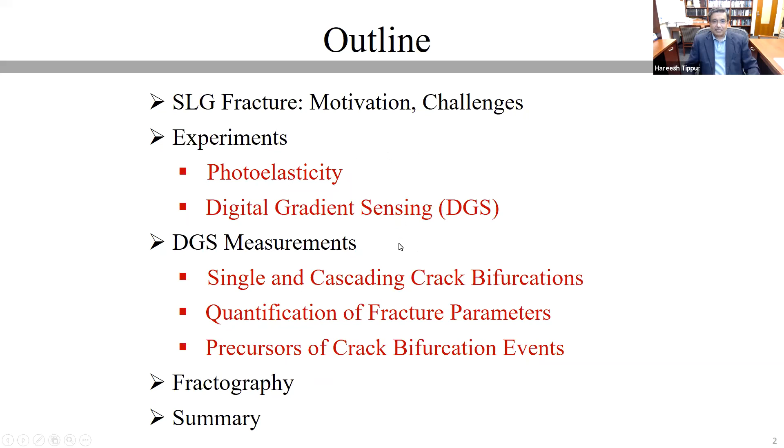So the motivation for this talk is as follows. Soda-lime glass is one of the very widely used structural materials, transparent structural materials. It is used both in civilian as well as military structures. You can see this iconic structure in front of the Louvre in Paris, and you can also see the glass cladding often used in skyscrapers. Another place you may not have noticed is the transparent armor used in armored vehicles. Some of these armored vehicle windows are about a foot thick, 12 inches thick, so that ammunition doesn't come through - shrapnel is prevented from entering the vehicle and harming the personnel.

Soda-lime glass is over 80% of all manufactured glasses even today.

This is a huge amount of glass. I once read that you could lay a road all the way from Los Angeles to New York using the amount of glass manufactured just in the US on a yearly basis. It has excellent optical properties, very high stiffness relative to other transparent materials, high compression strength, and excellent fire and chemical resistance. More importantly, it is a low-cost and sustainable material.

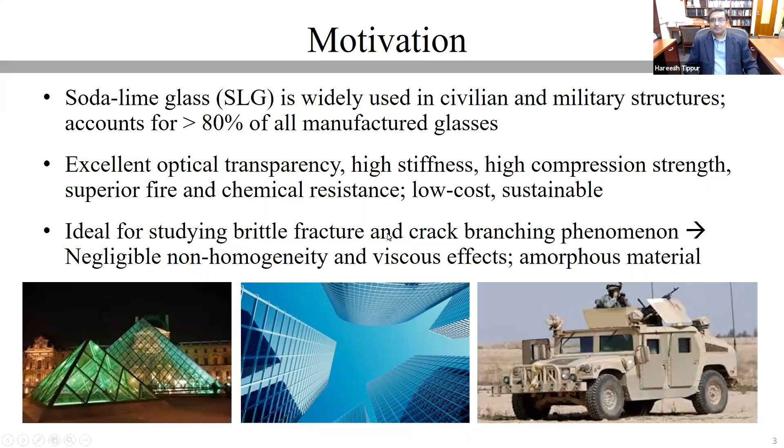The results don't necessarily match up nicely with the brittle fracture we often see in glass. This is an important challenge to note: the reason people were not able to study soda-lime glass all these years is because it is not only a stiff material, but also a highly brittle material.

Failure strain is less than 0.1%, and fracture toughness is 0.6 megapascal root meter, in case you're familiar with that literature. Tensile strength is rather low—at the low end it could be as low as 40-45 megapascals. And cracks in this material often travel very fast, typically in the range of 1,000 to 2,000 meters per second.

So a mile-per-second crack speed is very common in glass, particularly under dynamic conditions, and deformations are highly localized. When you talk about a hairline crack, this is truly a hairline crack—crack tip opening displacement is as small as 100 nanometers or less.

Another challenge we always come across with glass is that its elasto-optic properties are relatively weak. The stress optic constant and elasto-optic constant are both low—I'll explain what they are in a second—and as a result, full field optical investigations with glass have been prohibitively difficult.

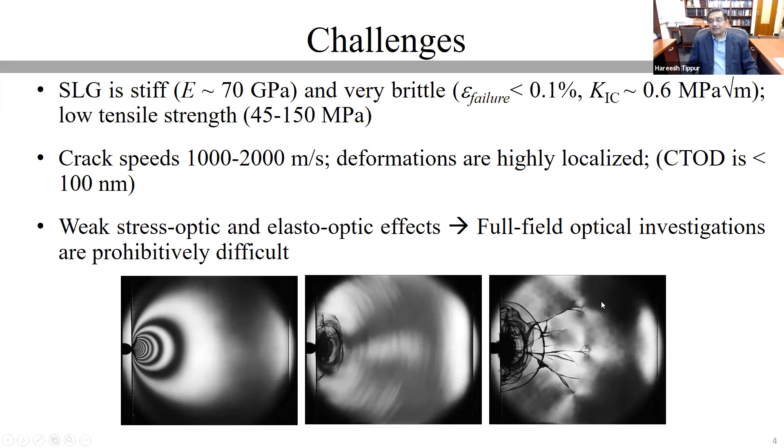Here I'm showing at the bottom an experiment we undertook a while ago where a projectile impacted the edge of a plate. You can see that when compression is dominant at the impact point, the photoelastic fringes form very nicely. On the other hand, when cracks begin to propagate, fringes disappear very quickly, and a propagating tensile crack usually does not have any fringes at all for us to analyze.

Let me talk about the experimental details—the specimen and material details. Our specimens are basically planar geometries with a V-notch on one edge, and a crack extended into the material a little bit further. All the experiments were done on quarter-inch thick samples. We have a couple of geometries, and I'll show results for both. This one is a 4-inch by 6-inch sample.

The material properties relevant to us are density—2,500 kg per meter cubed—and the longitudinal and shear wave speeds, which are 5,700 and 3,400 meters per second. I want to highlight the stress optic and elasto-optic constants of this ordinary soda-lime glass material. The stress optic constant is about an order different from that of Homalite, a popular polyester used to study crack branching events in the past. The elasto-optic effect is at least 40 times lower compared to, say, plexiglass.

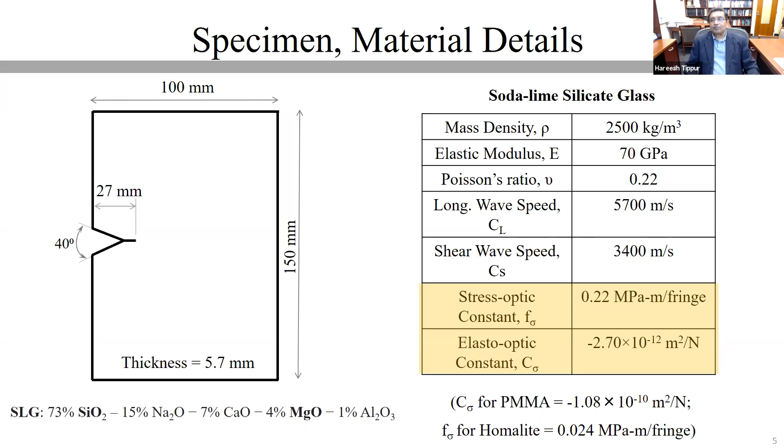These are the things that make studying glass extremely difficult, and people had given up on it for a long time, going instead to study the problem using polymeric materials, despite all the problems faced with polymer substrates. The specimen was loaded in our experiments using a 6-foot long bar.

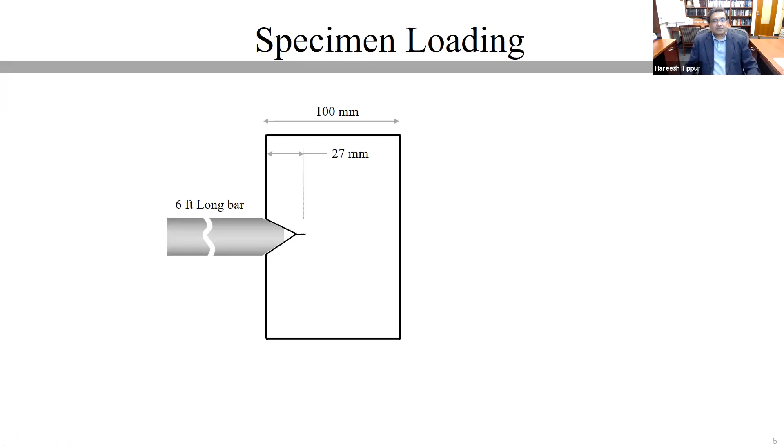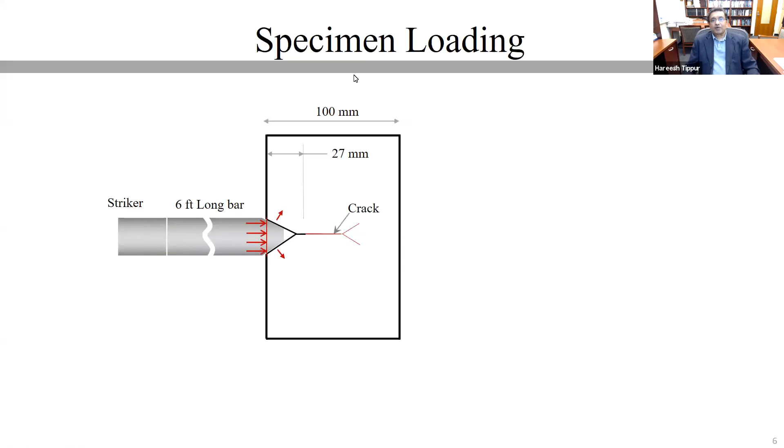It's a long bar so that we can get a one-dimensional wave to travel and impact the specimen. We basically launch a striker, and it creates a stress wave that loads the specimen. Once the crack initiates from the inserted notch tip, it travels some distance and basically branches on its own, without any provocation.

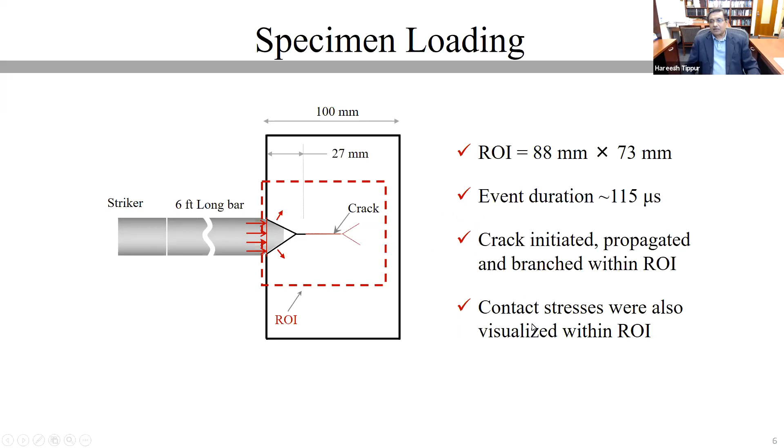The region of interest we investigated in this experiment is about 3.5 to 4 inches by about 3 inches—a fairly large area considering the sensitivity of the method I'll be showing you later. The event duration is about 100-plus microseconds, during which the crack initiates, branches, and propagates all the way to the end of the region of interest. We can also measure contact stresses by adjusting the location of the region of interest.

First, I will show you some photoelastic results so that you appreciate the difficulties that we faced.

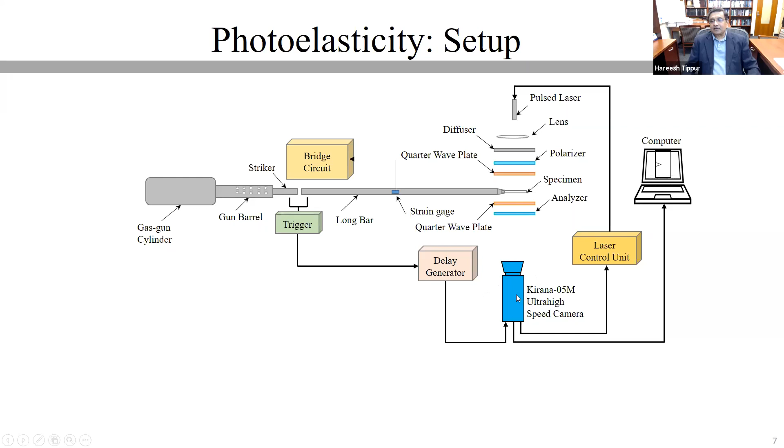The specimen is kept as part of a standard circular polariscope. It has a pulse laser, which produces laser pulses about 160 nanoseconds long and repeats itself. The event itself is captured in the form of fringes by a high-speed camera, which is a Kirana high-speed camera.

The details of that high-speed camera are as follows: it is a fixed resolution camera, 900 by 800 pixels approximately. It can run up to 5 million frames per second and can capture about 180 images at that resolution. All our experiments were done at 1 million frames per second.

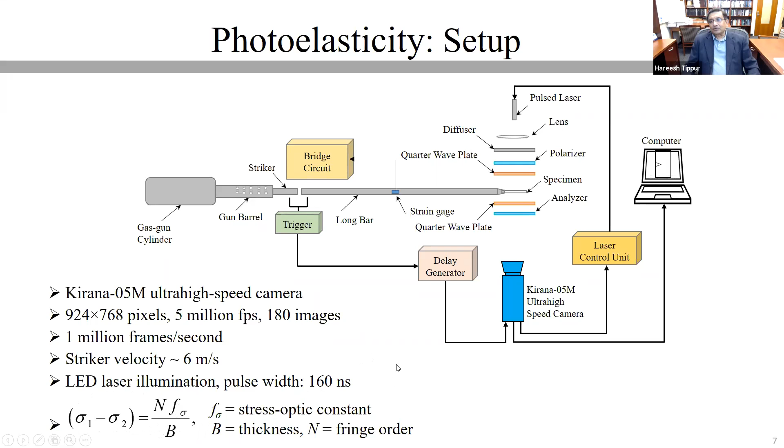The striker velocity that we used was a relatively low impact velocity of 6 meters per second, and as I noted before, the illumination was pulse illumination 160 nanoseconds long. We are measuring the principal stress differences using photoelasticity in the form of fringes.

So I'm going to play you a little animation to show the whole event and get an idea of what's going on. Here is the end of the long bar, which is tapered and inserted into the notch itself. You can see the contact stresses that have developed at the time instant 10 microseconds before the crack actually initiated.

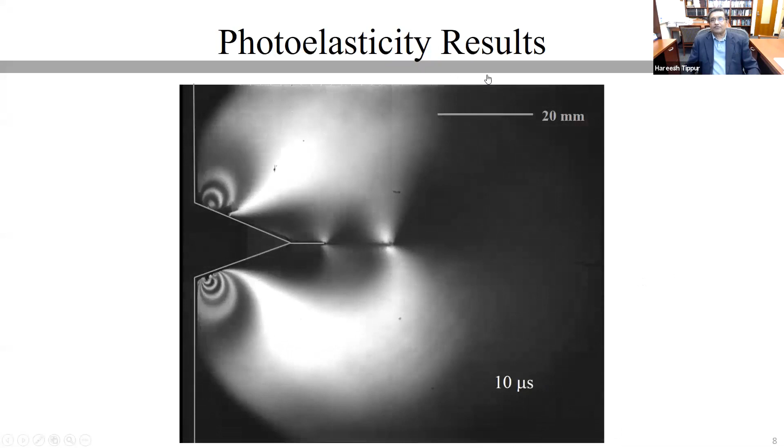When I run this animation, you see that the crack initiates and propagates to the middle of the field of view, and then branches without any provocation. You can clearly see when it is in the middle, you have these tiny fringes that form at the tip, along the crack flanks, and they also travel along the crack faces.

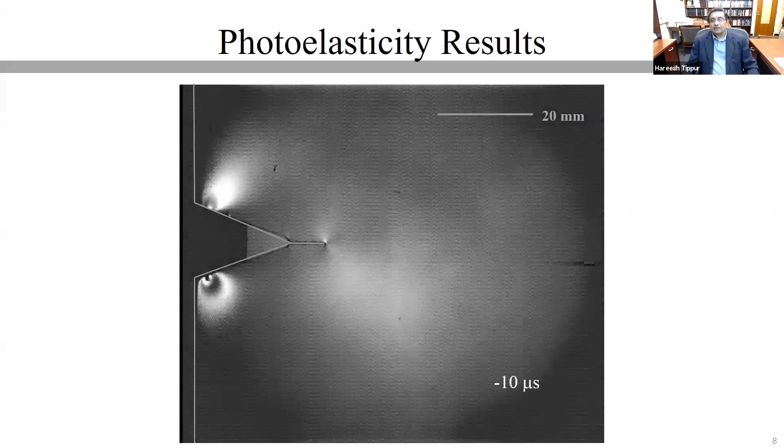Let me show you a few still images from that experiment. The top left here is for the case when the crack was loaded but had not initiated. The top right here is when the crack has propagated as a mode 1 crack, and we call it a mother crack. This mother crack eventually propagates, shown in the bottom left corner, and branches in the middle of the field of view, approximately in the middle. This is at a much later stage.

One of the points that I want to emphasize here is those tiny fringes that are traveling along the crack faces themselves. These are caused by the Rayleigh waves that are propagating along the crack faces, producing contact stresses because it's a nano scale crack opening displacement. So these stitch marks are attributed to Rayleigh waves that you see, but these are not necessarily the crack tip fringes themselves.

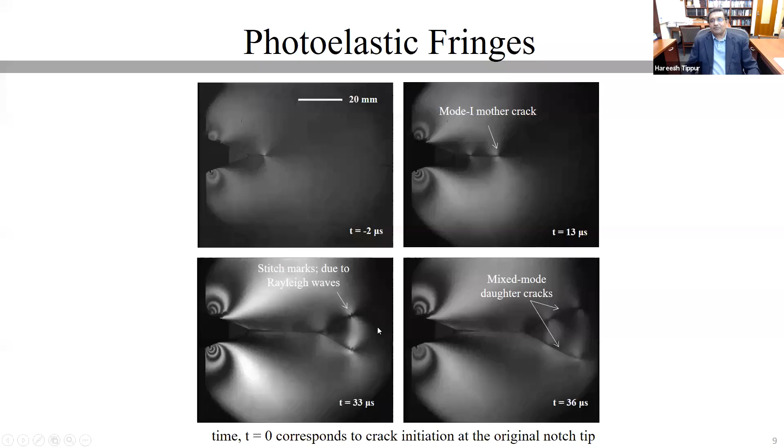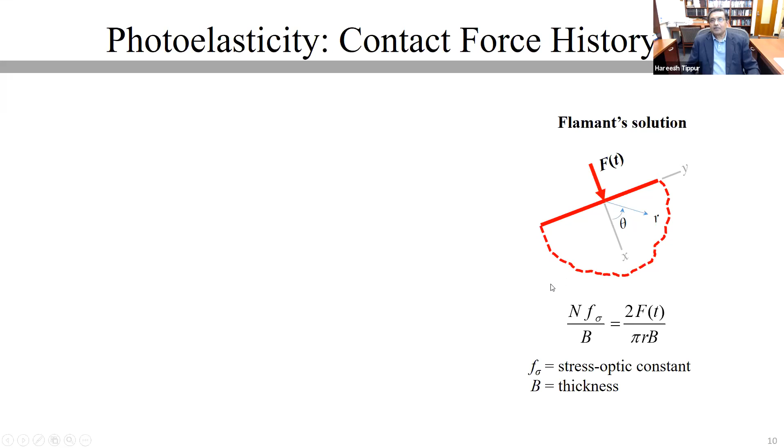You can also measure the load history, force history that you have imposed on the specimen using a simple approximation based on Flamant solution, and you can back out the force history by analyzing all those fringes that you saw. Normal force as a function of time here, and you can see that the loading produces some sort of a trapezoidal type of loading.

The first bar that you see, the grayscale, is for when the crack initiated, and the red is for the place, or the time, when the crack branched.

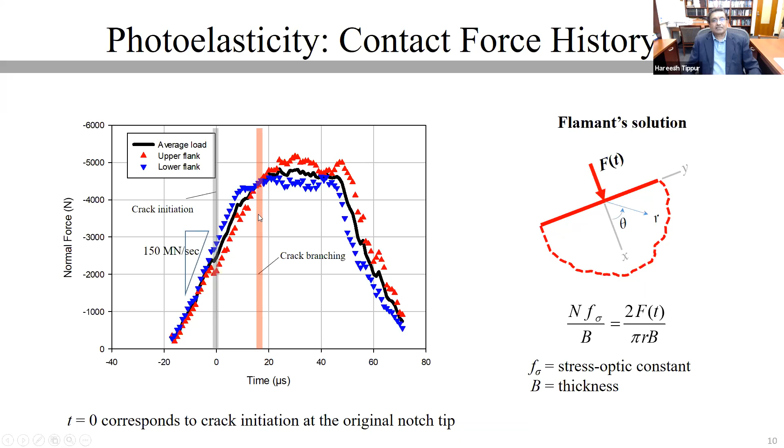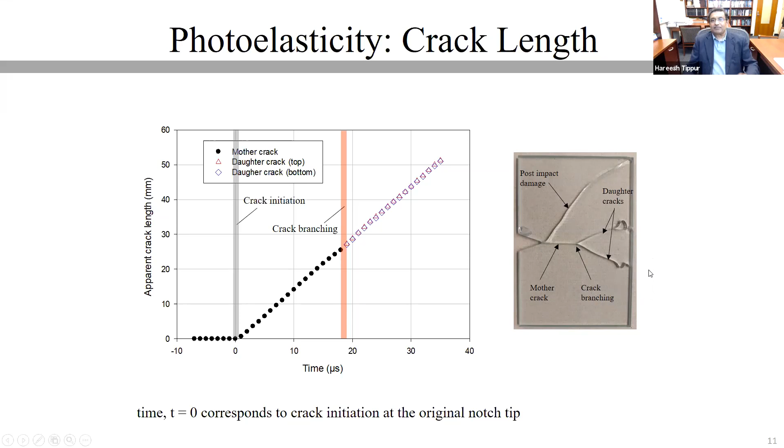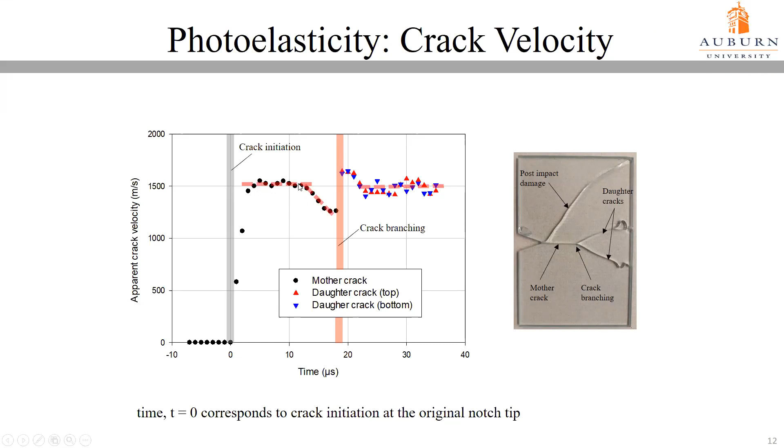So when the crack begins to slow down, at the end of that period, there is a crack branching event, and this branching event produces a sudden jump in the crack velocity, which again continues and settles down to this cruising speed of around 1,500 meters per second.

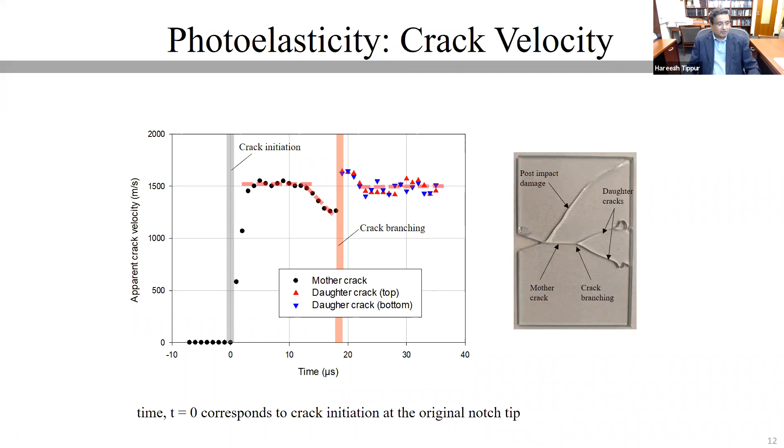So I want you to remember this signature: a constant velocity followed by a slowing down, and a sudden jump in the crack velocity after branching. This is a pattern that I want you to recognize in future experiments that I'm going to talk about.

Hareesh, just a quick clarification question. Sure. The velocity after branching is the projected velocity? It is along the crack length itself. Oh, along the crack length. Yes, yes, it is still 1,500 meters per second, not projected. Good question, okay thank you.

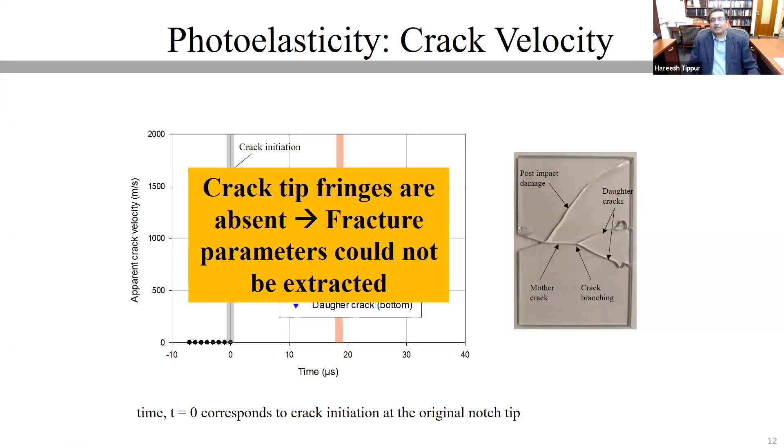The highlight that I'm making here is to emphasize the fact that the crack tip fringes are completely absent. You only saw the fringes near the compression zones, whereas there is no fringe at all in the tensile zone or in front of the growing crack. So as a result, the success of the photoelastic investigation was only partial, because I don't have any information regarding the stress intensification that's happening in front of the crack itself.

So we adapted different methods. One of the methods that I'm going to talk about today is a variation that Professor Huang mentioned in the beginning. This is a variation of CGS, but it is called digital gradient sensing. The methodology is completely different, it does not depend on interferometry at all.

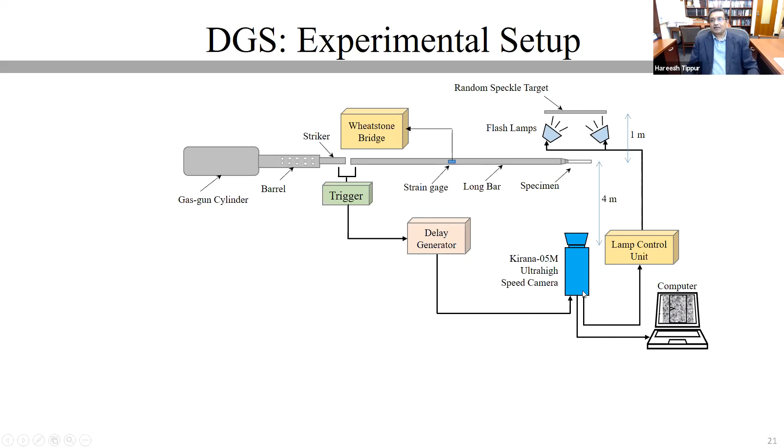And this target has random speckles sprayed on it, and we are photographing these speckles with a high-speed camera running at 1 million frames per second. The details of the camera are exactly the same as before. What we are measuring by this experimental setup is the angular deflections of light rays.

What we are measuring are two orthogonal angular deflections of light rays, phi x and phi y, which can be shown to be the gradients of stress, sigma x plus sigma y, in the crack growth direction and normal to the crack growth direction. So I want you to keep in mind that what we are measuring by this modification of the setup is angular deflections of light rays, by photographing random speckles through our high-speed camera.

Here is a little bit of the working principle of this new methodology, which is now about 7-8 years old. You can go to this particular paper that I have referenced at the bottom to find more details about how the method works.

Basically, it consists of a camera that is taking pictures of a random pattern that is placed behind a transparent specimen. These are random speckles that are on a plane that is different from the transparent specimen. If you spray paint your transparent specimen, it becomes your DIC.

Therefore, here, when we have no load on the specimen, when you take a picture of the speckle pattern, a point P gets imaged through a point O on the specimen plane by a pixel of the camera. So when I load the specimen, there is going to be a state of stress everywhere in the specimen, and you have thickness changes as well as refractive index changes that occur. As a result, if I were to take a picture of the speckle pattern, I'll be photographing a neighboring point of P, not the same point.

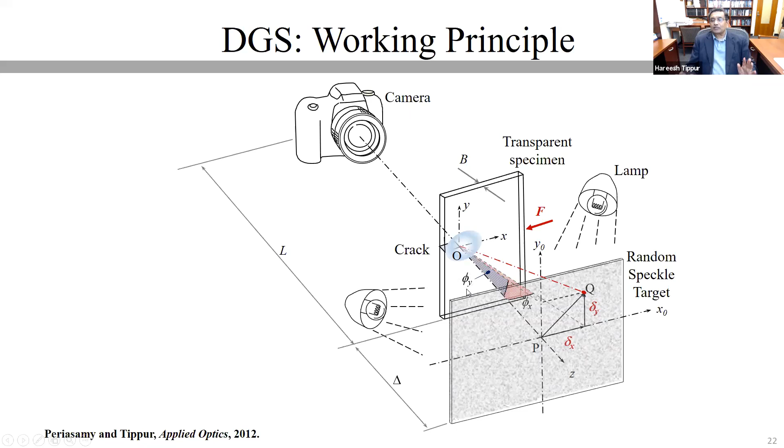I take those pseudo speckle shifts and divide that by the gap that exists between my specimen plane and the target plane. By doing that, I can get angular sweeps, phi x and phi y, along the XZ plane as well as the YZ plane, two orthogonal planes. So those angular deflections of light rays can again be interpreted as stress gradients if I were to bring in the material constant C sigma, which is the elasto-optic constant, and B, which is the nominal thickness of the specimen itself.

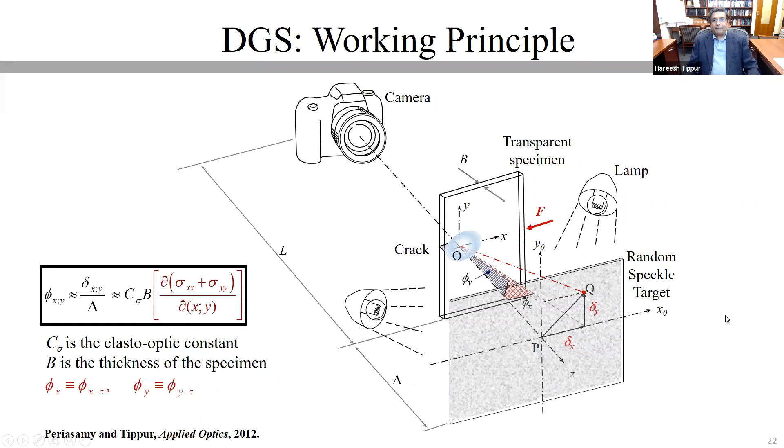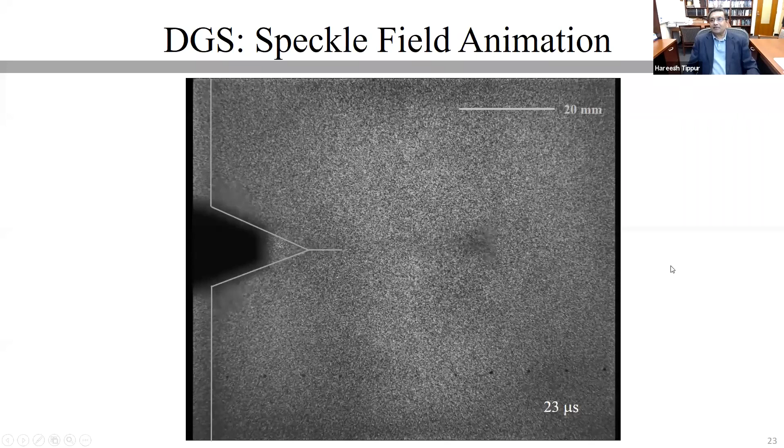Let me show you a little movie of the animation made out of these images. When I run this movie, all you're looking at is the speckles on the target plane. There's nothing very exciting going on as in the photoelasticity experiment, because all you're looking at are slightly distorted speckles—little blobs traveling along the potential crack path. There's not a whole lot you'll see just by looking at the images themselves, but you can certainly go back for post-processing.

When you do the post-processing, all you're doing is correlating the speckle image at each time step with the speckle image before the loading actually began. And you'll be able to see contours of these angular deflections.

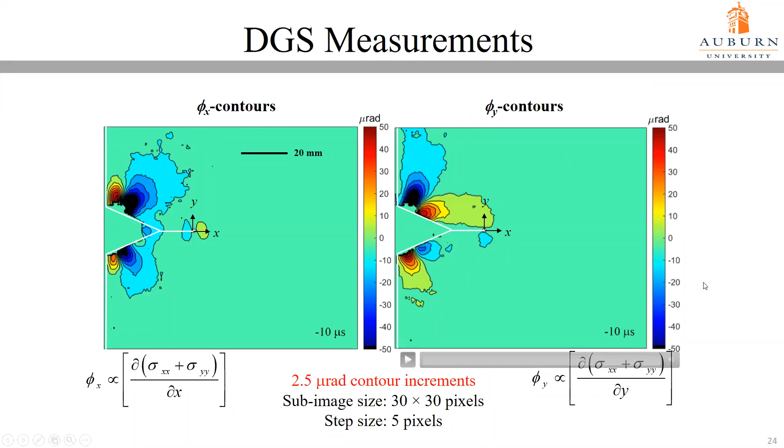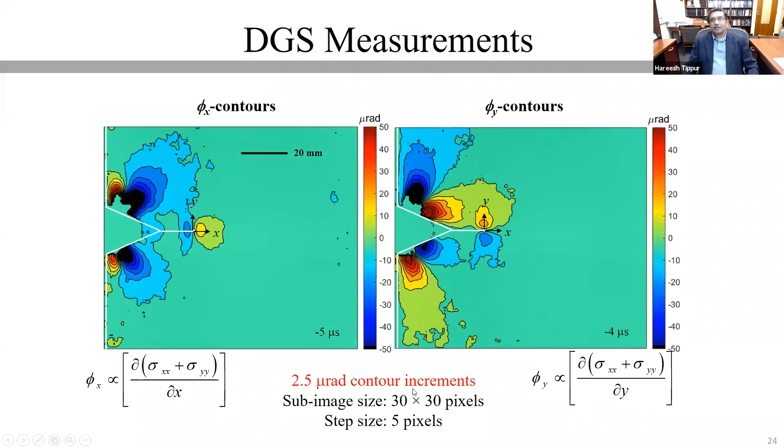These contours of angular deflections can also be animated. I'm plotting these as contours in 2.5 microradian increments. To give you some idea of 1 microradian, it's the angle subtended by 1 millimeter at a distance of 1 kilometer—that's how small 1 microradian is. So here, the left-hand animation tells you the evolution of the phi-x contours from the original crack tip, propagating for some distance.

It propagates for some distance and then branches out into 2 crack tips. The crack tips themselves can be tracked by looking at those white dots that we've placed artificially on the contour pattern. On the right-hand side, you see the contour patterns in the direction—the gradients are in the direction normal to the crack path itself.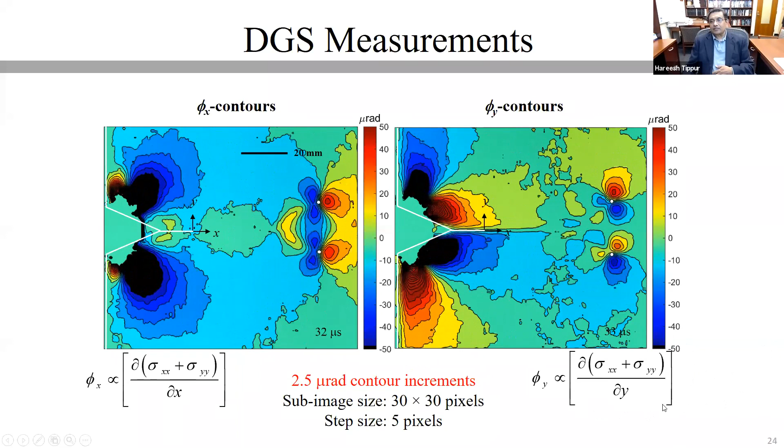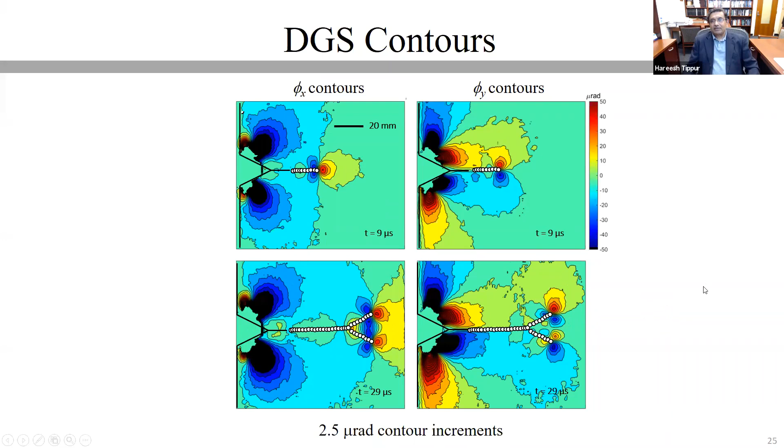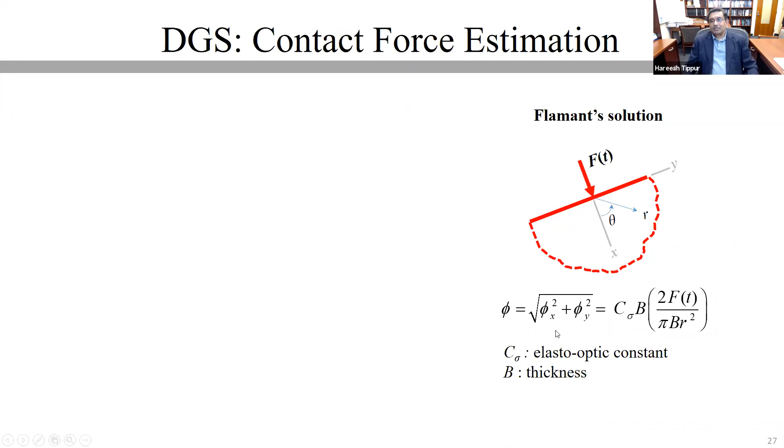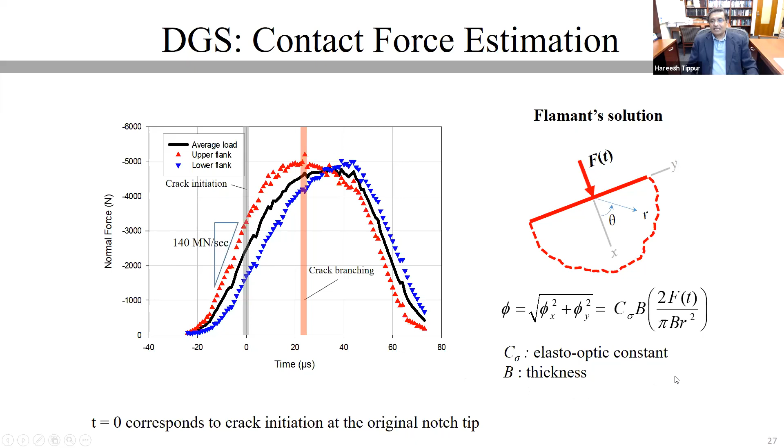Of course, like in the case of photoelasticity, you can also do contact stress analysis. You can use the same approximation of the Flamant solution and back out your force history by simply measuring the resultant angular deflections of light rays. So this is the history we were able to capture. Of course, this was a completely different experiment—the loading history was not necessarily all that symmetric as in the photoelasticity experiment, but nevertheless you see the behavior of this trapezium-shaped loading history that is typical of these types of Kolsky-Bar experiments.

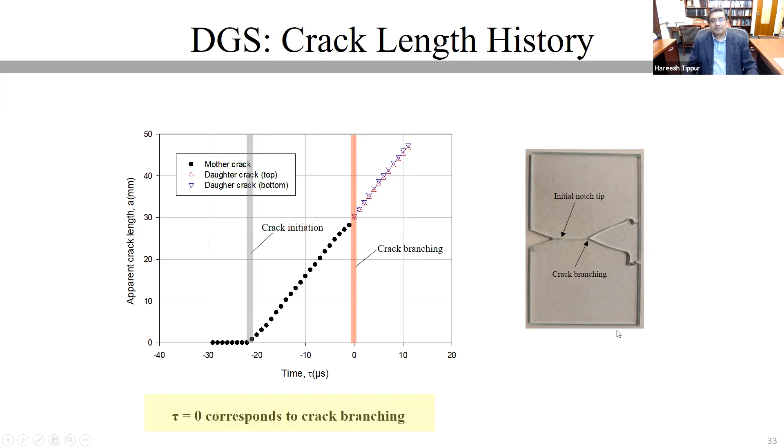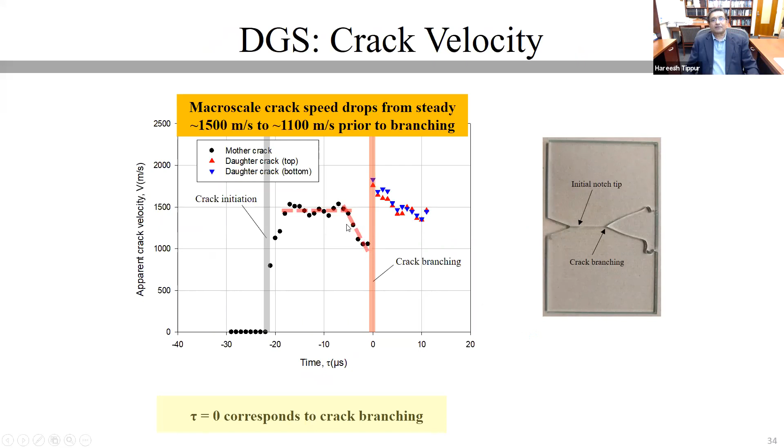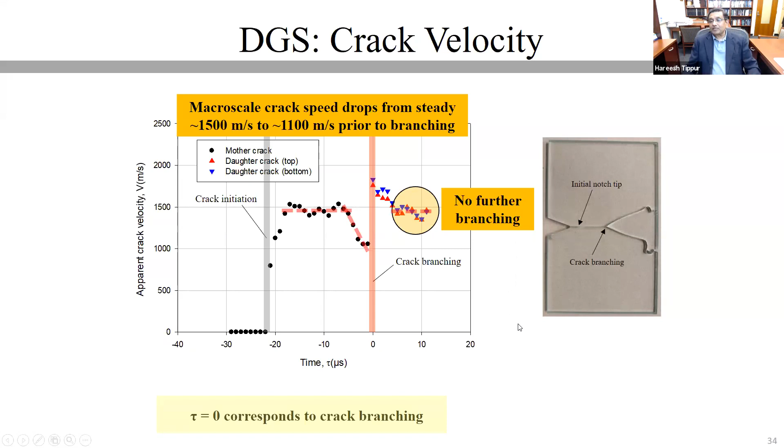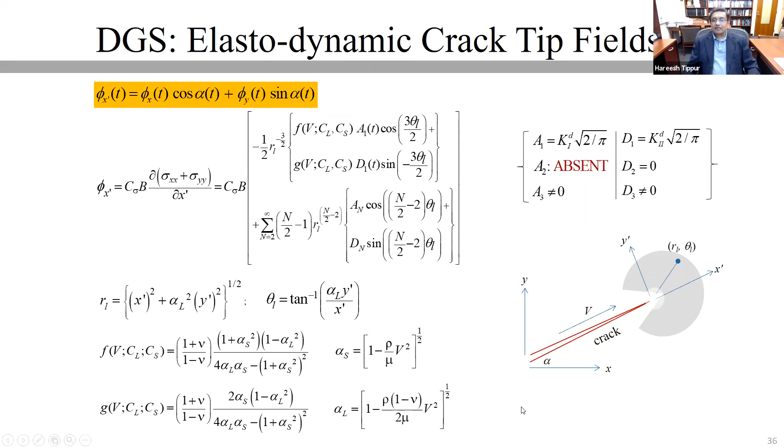You can also obtain the higher order terms by including as many terms as you want. In this case, the T-stress term A2 is absent and D2 is 0. One pair of higher order terms we have been able to extract in these experiments, which I'm not going to talk about much in this talk, is A3 and D3. Other parameters such as R and theta, the contracted polar coordinates, are shown here, and the explicit expressions for F and G can be found in any standard dynamic fracture mechanics book.

So here are the stress intensity factor histories that we were not able to measure in photoelasticity. The mother crack's stress intensity factor increases before initiation, and then it initiates somewhere around 0.7 megapascal root meter. This is a notch, and that's where the initiation took place.

Again, the gray bar is associated with crack initiation, and the red bar is where branching took place. Due to initiation at the notch, the crack unloads a little bit, then begins to ramp up again, building up to approximately twice the value of the low stress intensity factor. The value of around 0.55 to 0.6 increases to about 1.1, 1.2 megapascal root meter, and then branches. When it branches, it drops down to approximately the same value as the low point for the mother crack, and the values continue to increase.

The solid symbols, the upright triangle, are for the upper branch, and the inverted triangles are for the lower branch. The open symbols you see in this chart are always for the mode 2 stress intensity factors, and they are negligibly small for the mother crack.

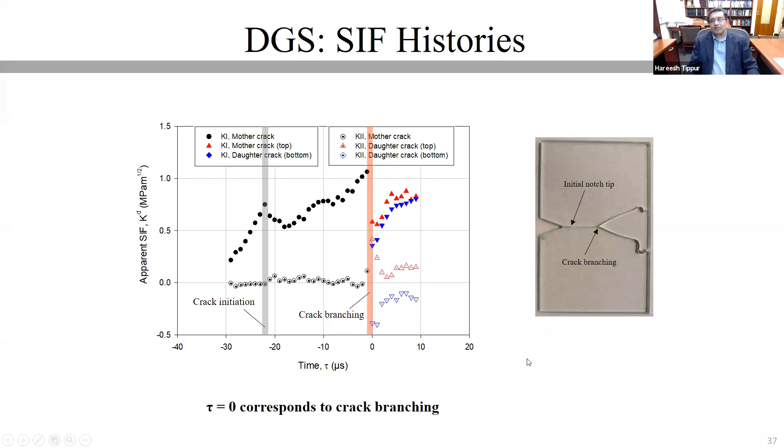Once you have the mixed mode branches form, the two daughter cracks form, you get some constant value of K2 towards the end of the fracture event that we were able to capture. Also, I want to point out that the values of K1 never increased again to a high value of around 1.1, 1.2 megapascal root meter. I'm throwing a bunch of numbers here because these are the ones that make sense in terms of the consistency and the precursors I'm going to talk about down the line.

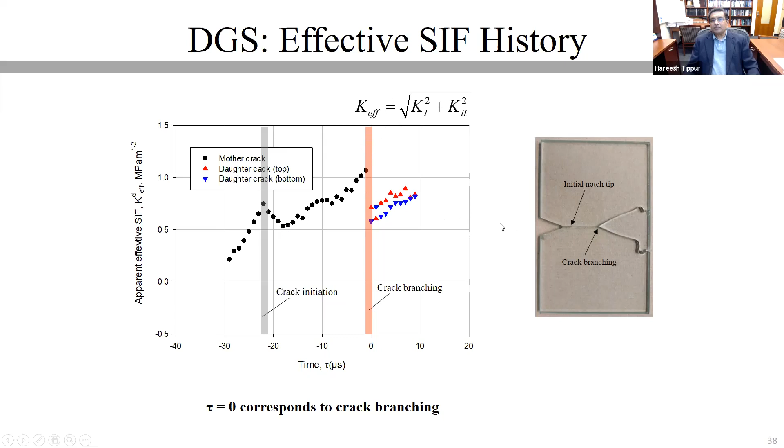The effective stress intensity factors were created using both the mode 1 and mode 2 stress intensity factors. These trends look very similar to K1 because that is the dominant contributor in this particular geometry and experiment. As I noted before, the effective stress intensity factor increases monotonically prior to branching, reaching a value of approximately 2 times its value at initiation.

I call this point the initiation because that's where the unloading has ended and it begins to increase. Once branching takes place, these values are also increasing, but they never reach a value sufficient for it to branch again. So we concluded that maybe we should increase the dimensions of the specimen so that the crack runs and produces subsequent branches, or cascading crack branch formations.

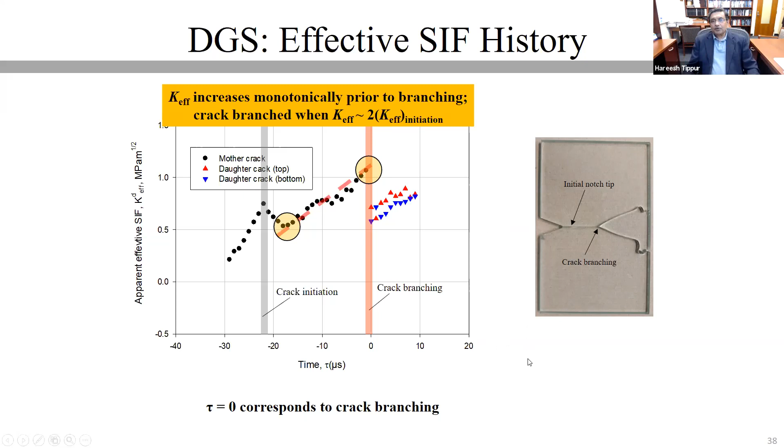Before showing you those results, I want to bring up that we had a whole bunch of measurements, including the higher order terms. We started grouping these things together in order to see what sticks.

What I'm going to share with you today is that when you combine the effective stress intensity factor and the measured crack velocity, multiplied by the longitudinal wave speed of the glass divided by the square root of W, the width of the specimen, you get a quantity I call sigma hat. I call it activation stress for lack of a better explanation at this stage. It has units of megapascals, or units of stress.

By plotting the history of this activation stress, sigma hat, we observed that branching occurred at a value somewhere around 17 to 19 megapascals. Once branching took place, the activation stress never reached a value high enough for it to branch again. This was a hypothesis, and we tried to test it with other experiments.

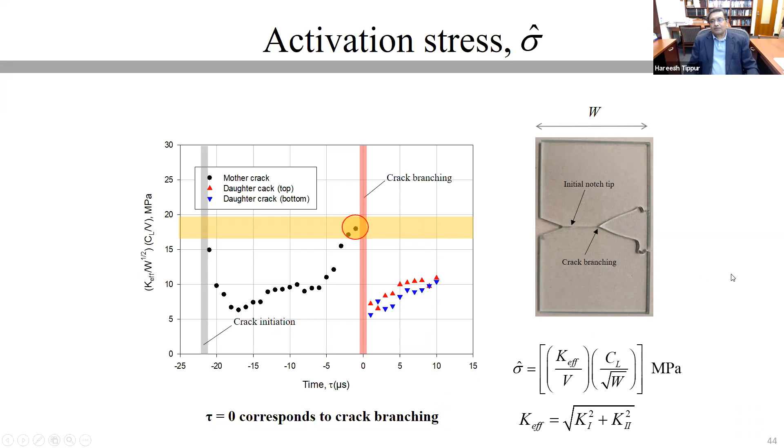So I'm going to change the geometry on you at this stage by making the specimen wider. The specimen here is a 6 inch by 6 inch specimen instead of the 4 inch by 6 inch. The experimental setup is similar.

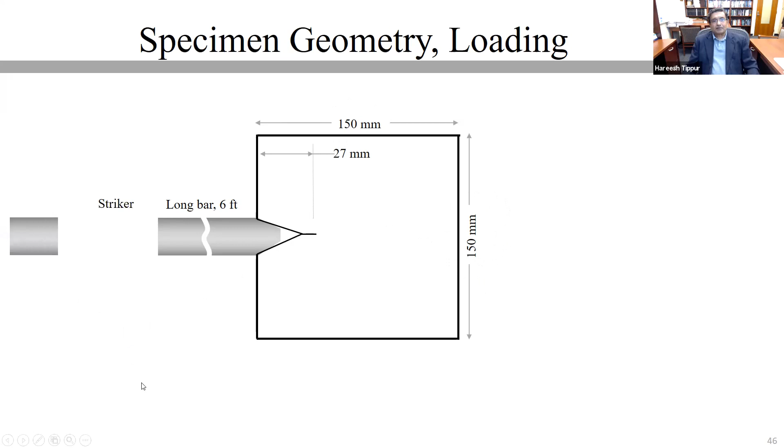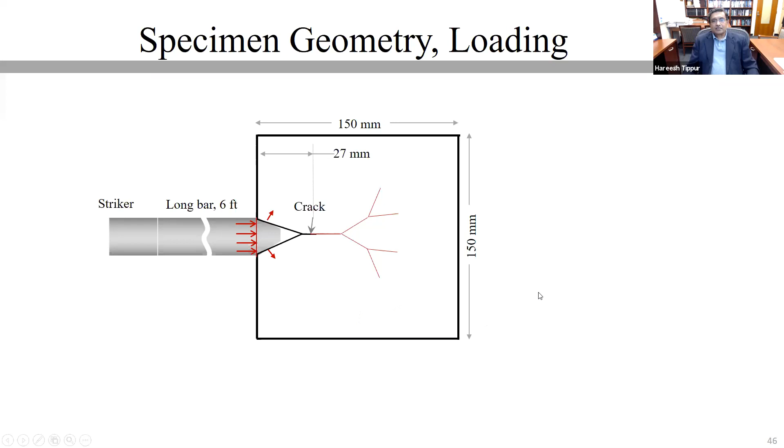We launch a striker, we load the specimen, and then we create the crack propagation. And then that branches and produces a second set of bifurcations, as a result of our limited ability to capture the region of interest.

We wanted to keep the region of interest the same without modifying things a lot, so we moved the region of interest a little bit into the specimen itself. The event duration is the same, region of interest is the same. However, we are able to see the details associated with not only the first bifurcation, but another pair of bifurcation, which happened at the end of your region of interest.

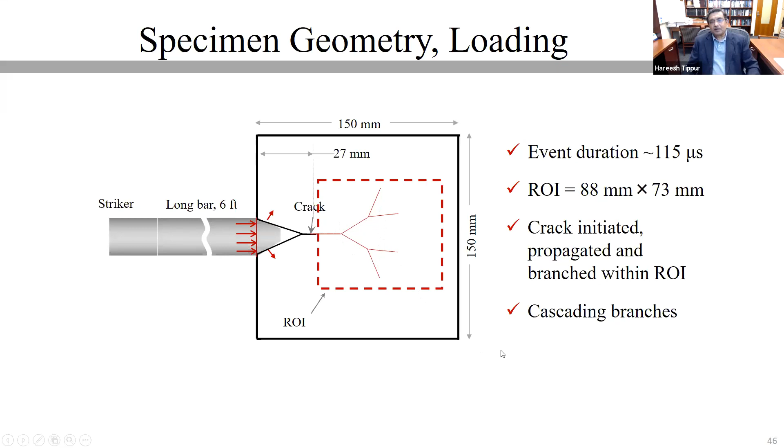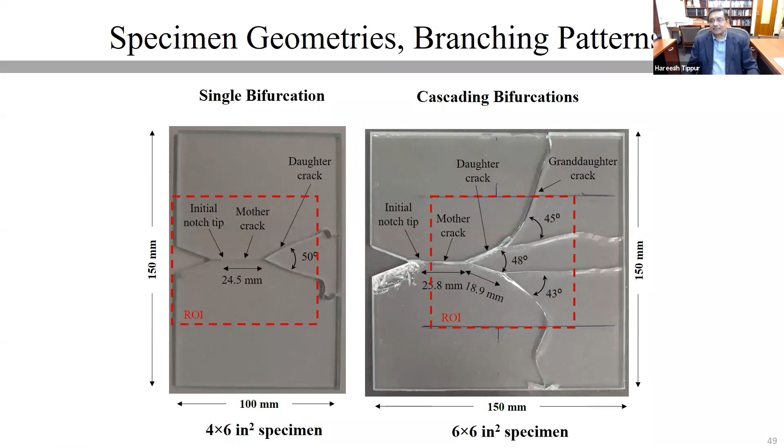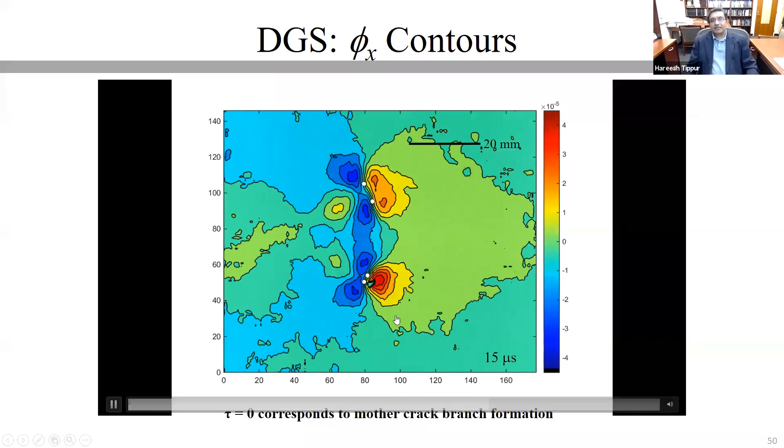So you can see the dots represent your current crack tip position. The crack initially propagates and then branches. And then basically at the end of the event, you're seeing 4 different sets of these Phi-X contours propagating from 4 different crack tips, all occurring simultaneously.

I like to plot these things in the form of contours because I came from interferometry, but in reality, this is information that is available everywhere in the field at the center of each subimage.

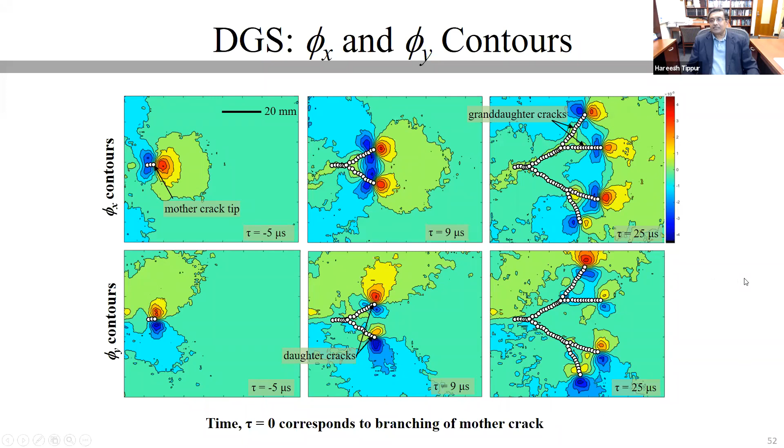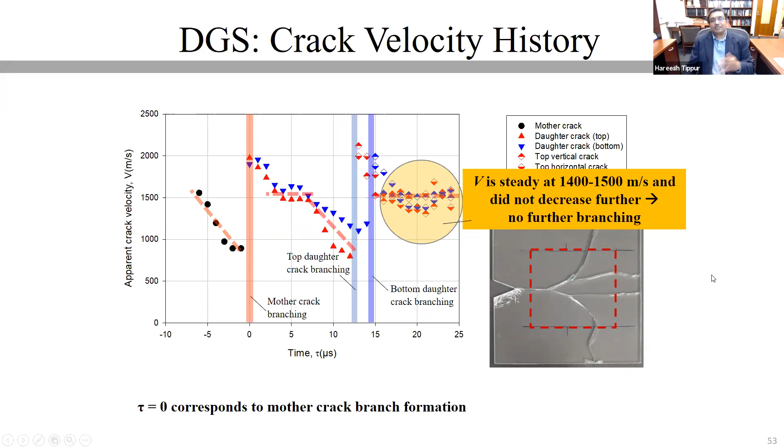In the last part over here, the velocity never decreased from 1500 meters per second, and obviously we did not see any branching, or consistently we did not see any branching as we had seen before. We also have extracted stress intensity factors without any details here.

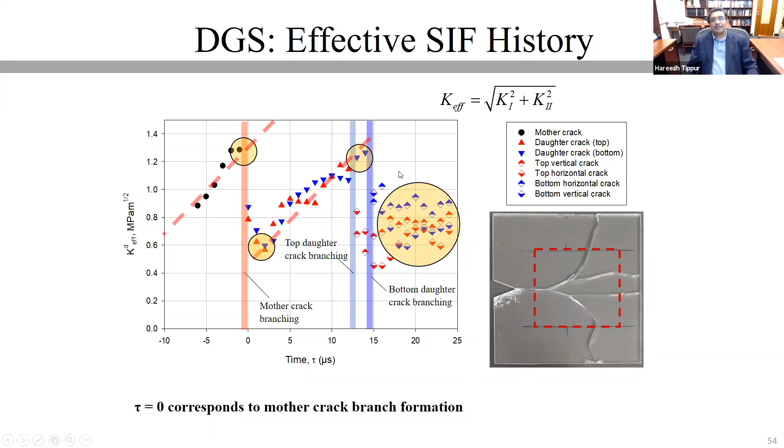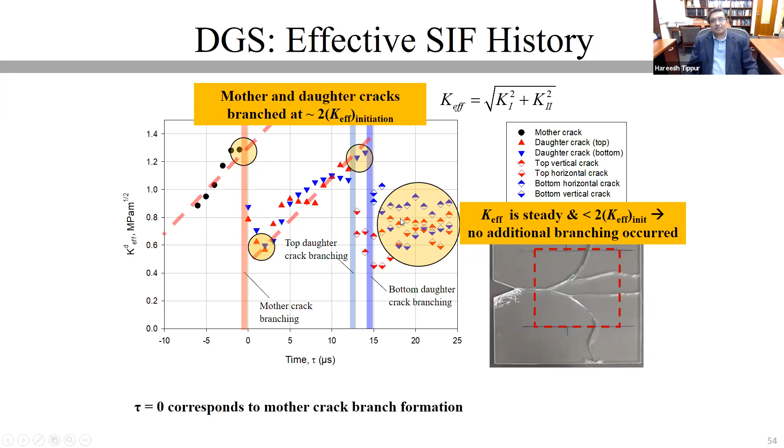And once the branching took place, the value once again dropped to a low value of 0.6, same as in the smaller specimen. This value again built up to 1.2, 1.3 megapascal root meter and branched again. Once the branching took place, none of the granddaughter cracks show a value large enough. So I want to highlight that mother and daughter cracks branched at 2 times the effective stress intensity factor at initiation - this is my initiation corresponding to that mother crack.

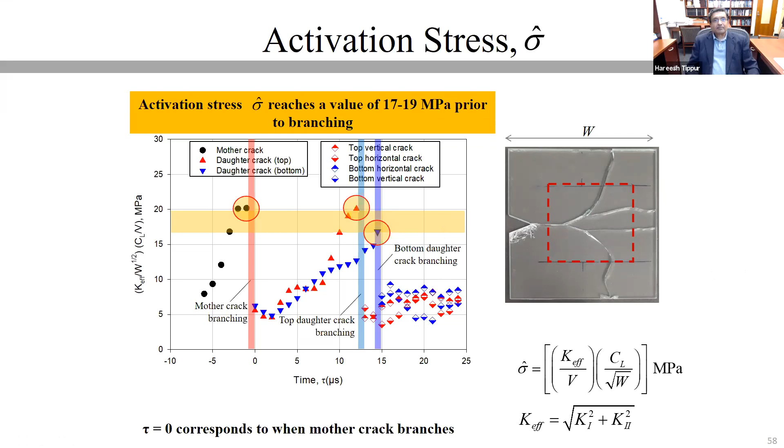In the later stages, it never reached the threshold value for branching to occur. This activation stress that I pointed out in the previous geometry was again plotted, and that value reaches somewhere between 17, in this case slightly higher than 19 megapascals. But the two daughter cracks branched at a value approximately in the 17 to 19 megapascal range. We still believe this parameter may have value in understanding fracture behavior. When I look at the 4 granddaughter cracks, none reached a high enough value of 17 to 19 megapascals. Remember, the low tensile stress value for this material is reported around 45 in the literature, so this activation stress is significantly lower for all 4 granddaughter cracks, and we are not seeing any branching - consistent with previous experiments.

So here is one experiment. We have done this experiment several times, and I want to show you one where things were not very symmetric, to see if the same idea holds good or not. This was a repeatability experiment where the crack has propagated, but the very initiation ended up being a mixed mode crack instead of a mode 1 crack. These are the difficulties of an experimentalist. We produced a mixed mode crack which eventually became a mode 1 crack, and then 2 daughter cracks and 4 granddaughter cracks.

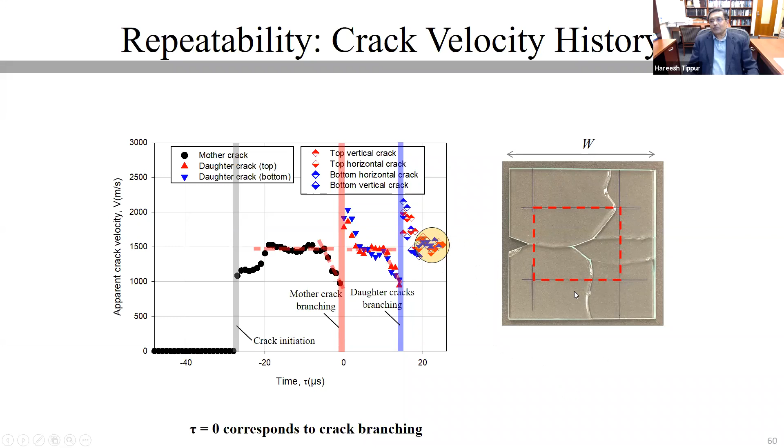Even in this case, when you plotted the crack velocity histories, we see the mother crack was propagating around 1500 meters per second, slowed down, jumped to a very high value of 1800 to 2000 meters per second, settled down to 1500 meters per second again, slowed down again, branched, and then produced four granddaughter cracks in four cascading branch formations. That again settled down to another 1500 meters per second without further branching. So no branching took place beyond the second set of branches.

The effective stress intensity factor similarly at the first branching event - notice in this case I have the gray line also. So we were able to capture the crack initiation, the branching, as well as cascading branch formations later on. This was an experiment that was more successful in some respects.

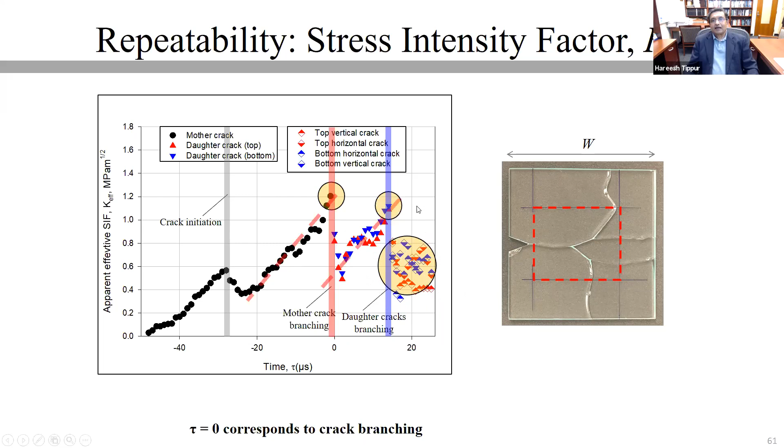So here you have the stress intensity factor increased to about 1.2 megapascal root meter or slightly higher, and then branched. And from this low value, it again branched at around 1.2 megapascal root meter. The granddaughter cracks did not reach a high enough threshold value for branching to occur.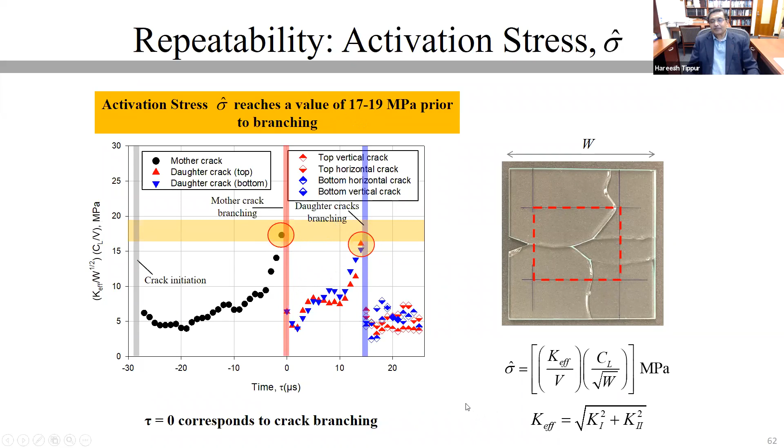Here is that activation stress, or the sigma hat parameter I was talking about. Here you have two sets of branches, but both branches did not take place at the same time instant. The first branching event is the red line, and the blue line is the second set of branches. In each case, the sigma hat value is somewhere in the range I'm talking about, 17 to 19 megapascals.

So at this stage, I'm going to switch over to fractography. Before that, the emphasis is on the precursors we have identified in this talk - three precursors. One is the slowing down of crack velocity before branching, with crack propagation dropping from 1500 to 1000 meters per second. And the doubling of the effective stress intensity factor by a factor of 2, and the sigma hat value somewhere in the range of 17 to 19 megapascals.

So here is a fractographic image from a digital microscope - a Keyence microscope, some of you may have worked on this. Here I'm showing the surface of the fractured glass from a single bifurcation experiment. The crack is propagating from bottom to top. The lower part here is your mirror region. Typically in dynamic fracture mechanics literature, you come across mirror, mist, and hackle regions as demarcations for the phase of the growing crack.

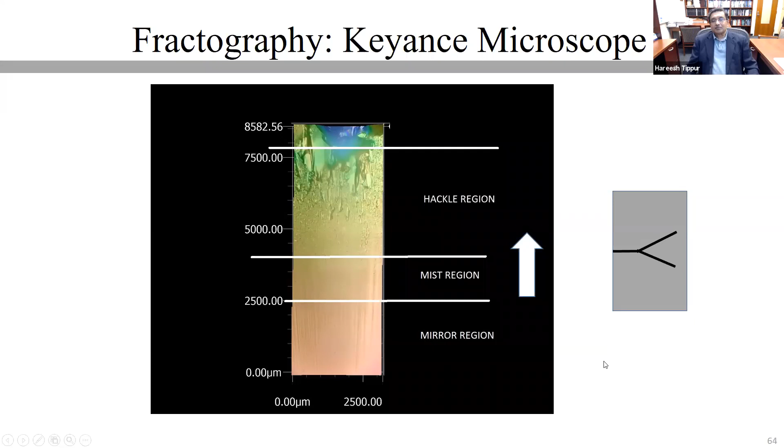Unfortunately, the resolution of this digital microscope was not good enough for us to extract the roughness in the mirror and mist region very accurately. Of course, we could get information in the hackle region, which is reasonably valuable. Therefore, we switched over to another microscope, which is a nanoscale resolution microscope.

This is again a digital microscope. Each of these images you are seeing is approximately 0.5 millimeter by 0.5 millimeter, and the color scheme differs for different images. What I want to emphasize is the top two images correspond to your mirror region, where there were no features at all in the Keyence microscope.

But here you can actually see the Wallner lines. Wallner lines are the stress waves that interfere when they reflect off of the free surfaces of the specimen and create these periodic structures. The lower left corner represents your mist region, which is a preamble to the hackle region, where big chunks of material are being pulled out from the substrate.

We are able to measure the surface roughness for each of these stages. One thing I want to point out before going to the roughness itself is the conic marks that are often reported to be part of fracture surfaces in polymer literature are completely absent in all of our measurements.

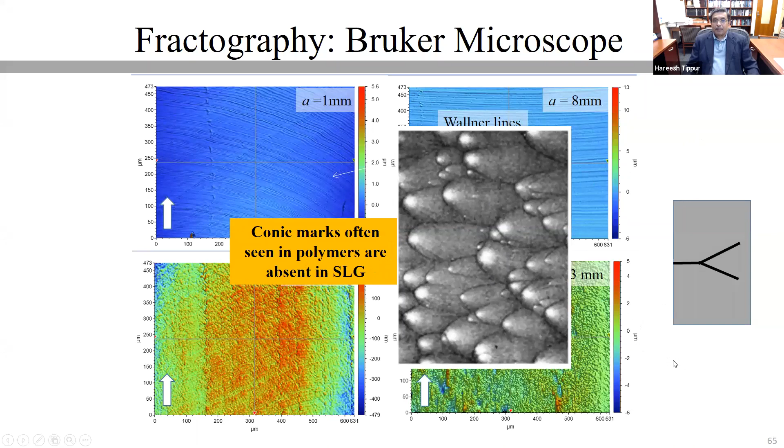So I think this is simply an artifact of what we normally see in polymers, which could be the inhomogeneities, or it could be the viscous effects that are dominant in polymers. So we don't see any of that in soda-lime glass. Roughness was plotted based on the existing polymer literature, as a function of crack length, and then crack velocity.

When you look at the fracture surface roughness as a function of crack length, you see that in the mirror region, these are the low values here. This is where the crack initiated. The gray line here represents your notch initiated, and then there is some roughness, and then it settles down to a nanoscale surface roughness, which is where the mirror region is.

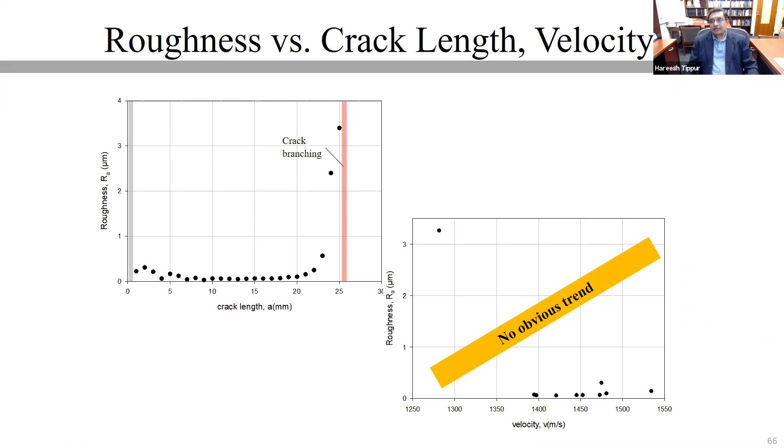We plotted roughness as a function of velocity because this will give you a significant advantage in terms of simply measuring the velocity and making post-mortem measurements to identify what caused the branch. Here, we did not see any obvious trend. So this again departs from polymer material literature, where glass fracture, particularly dynamic fracture, does not correlate with what is reported in polymer literature.

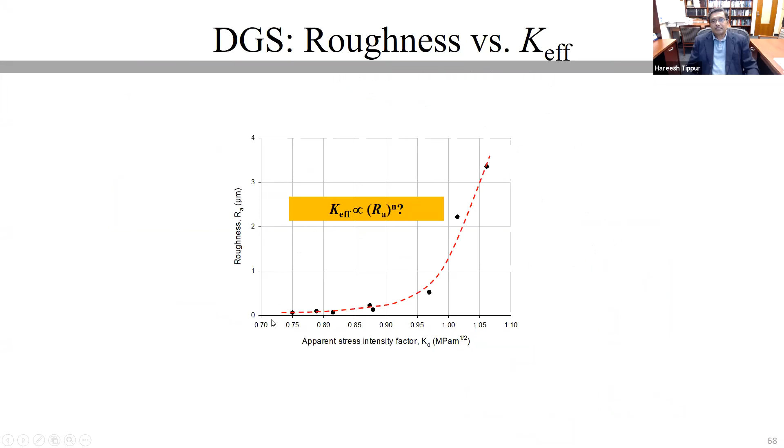So we tried to plot roughness as a function of the effective stress intensity factor. Lo and behold, we seem to have some kind of a power law type of behavior. To confirm that, we plotted roughness as a function of log of that quantity, as a function of your effective stress intensity factor, as well as sigma hat, the activation stress I was talking about. Both of them seem to show some sort of linear response, and this is where we want to explore further in our future experiments.

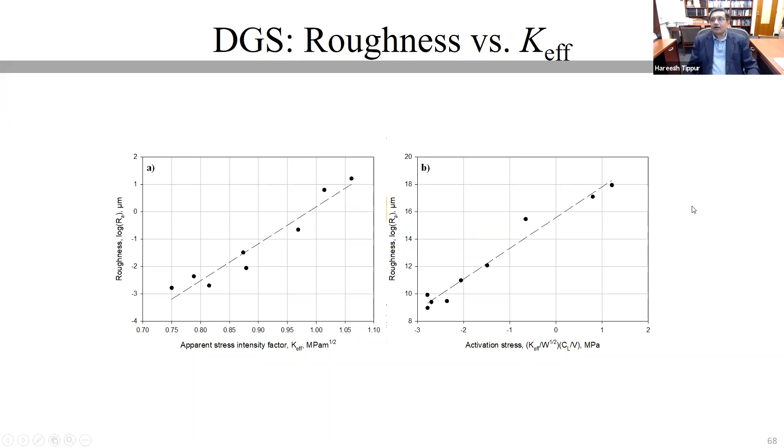So with that, I'm going to summarize this talk by saying that this new technique, digital gradient sensing technique, has overcome the severe challenges associated with the mapping of fracture in soda-lime glass, particularly dynamic fracture. A drop in the crack velocity from about 1500 meters per second to 1000 meters per second is a consistent marker of imminent branching event in all the geometries we have studied so far.

Crack bifurcates when effective stress intensity factor is approximately twice the value at initiation, and sigma hat reaches a consistent value of 17 to 19 megapascals. Mirror, mist, and hackle regions are seen, but we don't see any conic marks.

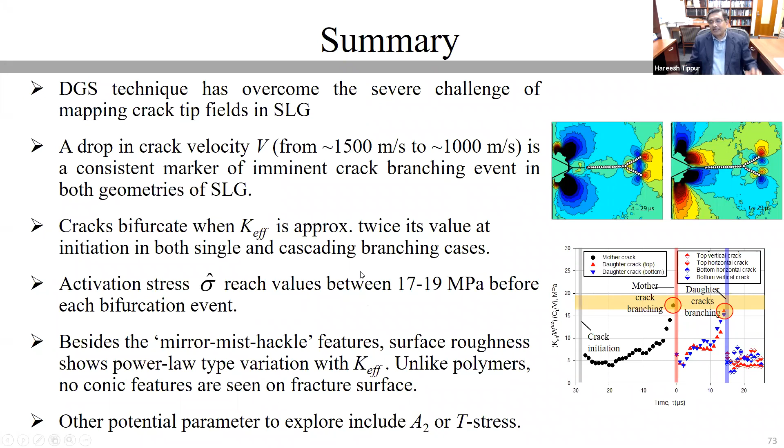One place we still need to explore is how do we go about evaluating the T-stress in order to explain our phenomenon a little bit better, particularly in terms of the crack branching angles, etc. So with that, I'm going to stop and take any questions that you may have.